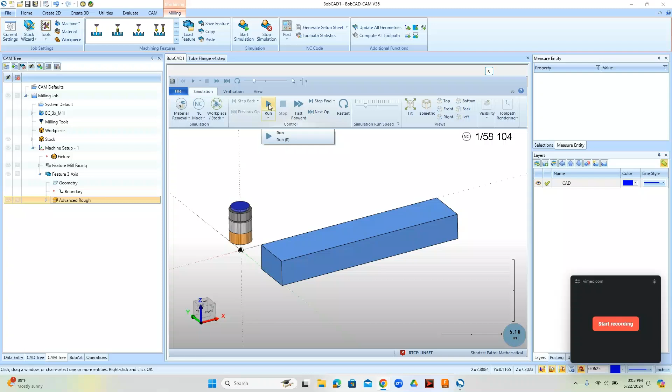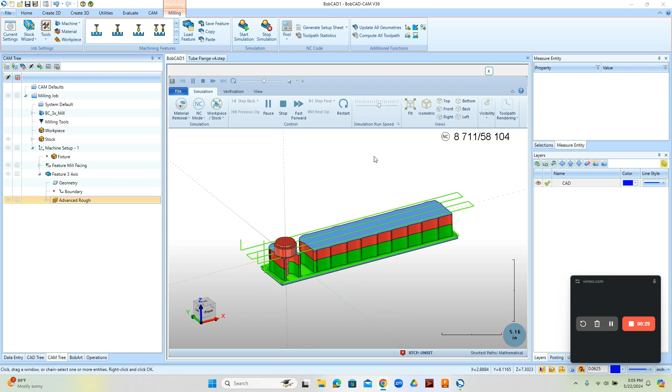This is where instead of machining one part at a time, we're going to machine multiple parts at a time, cut out of one strip of material. So instead of cutting a bunch of smaller blanks and holding them each separately, we're going to take a longer strip of material and copy the part down so we have multiple parts that we can cut at one time, with the goal of speeding up our production.

And if you got the right flute length, you're not going to be seeing all this red. But let's go ahead and get into it.

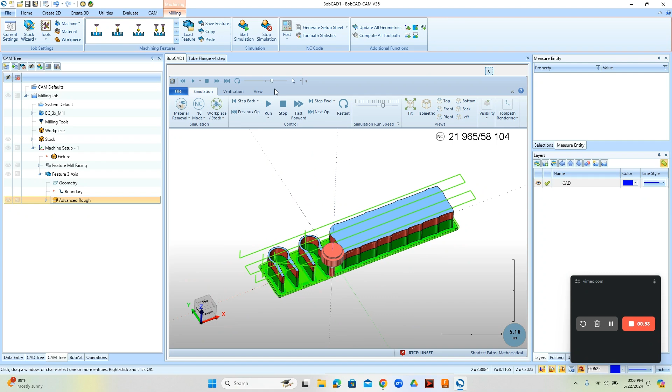Okay, so let me stop this simulation and come back over to our part geometry. So this is the part that we want to work with, and the first step that we want to do is make however many copies we want to make.

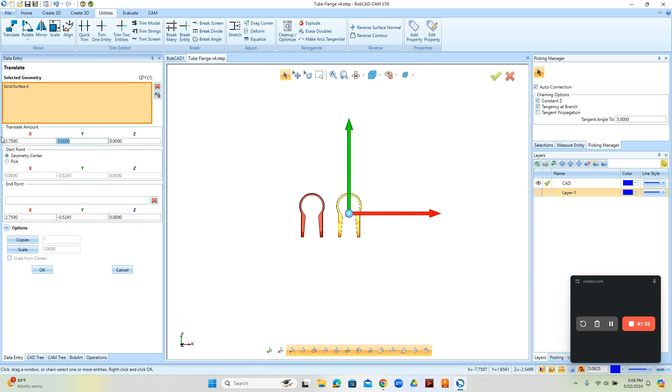So we're going to go to Utilities, Translate, select our part. We're going to set our spacing in between. It's important that the spacing in between is great enough so that the tool can fit between it. And then we'll set the number of copies that we want to make at a time and choose OK.

Alright, so what we've done is instead of just working with one part at a time, we made copies for multiple parts at a time.

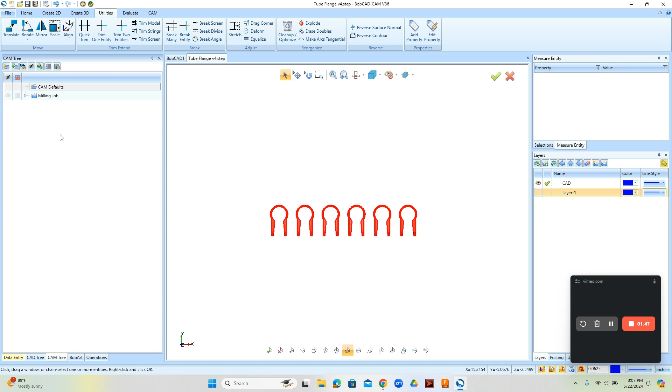Now the next thing we're going to do is just go in and set up our job. We'll make sure to select our workpiece here. It will use the bounding box in order to find the min-max. We want to add a quarter inch all the way around, and then we'll add a little more material on the bottom. So we'll box it in but leave some stock on the bottom so we have something to hold on to, and then we'll choose next.

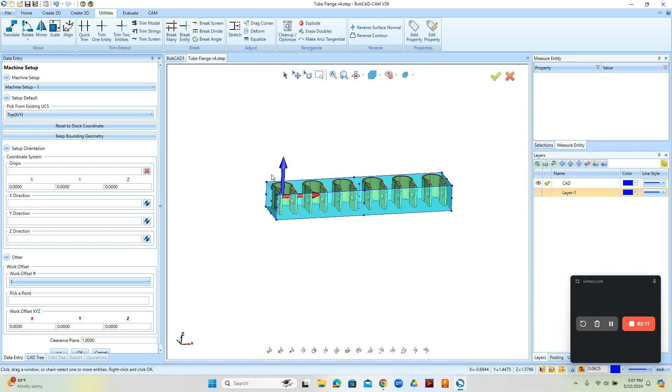From here we can come in and pick up our zero position, so we're going to grab this position here and then we'll choose OK. Alright, now we got our stock set up, we have our parts set up.

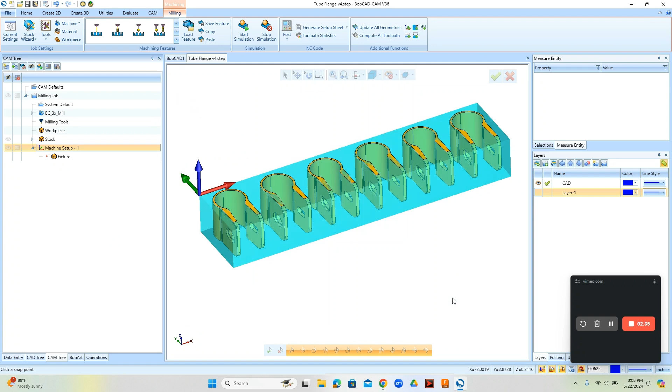We might want to run a facing routine to begin with. So using the facing routine, we can really just set our tool size and our cutting parameters, and if you have your stock set up and you've selected your work pieces, it's going to automatically pick up that boundary. So we'll go ahead and face off the part.

Alright, now the next thing we want to do, we could come in and extract geometry and do 2D machining, but 3D machining is going to be easier for this. So we're going to load in a Mill 3 Axis. We'll go ahead and select all of our part geometry here, or our workpiece, and then we're going to use an advanced rough routine. Alright, so we'll load in advanced rough.

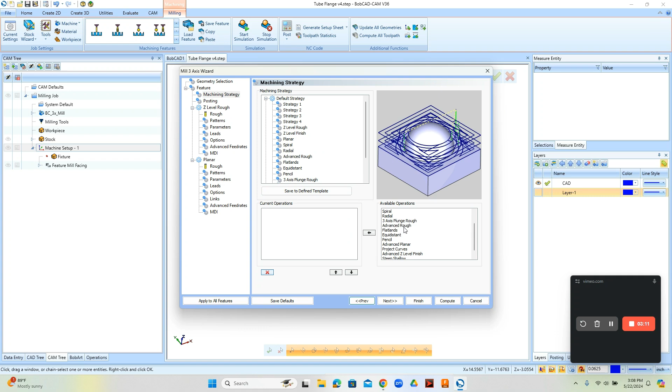We'll go ahead and set the tool size that we want to work with. We're going to choose adaptive. We're going to talk about the depth here because we want to cut all the way down to the bottom. We want to do it in one pass. Our step over here, we'll just set it to .200 for now.

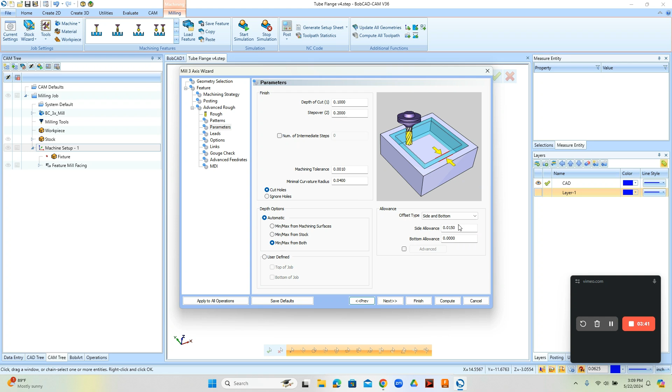Our machining tolerance, I'm going to loosen up, and I'm going to just leave a side allowance for a profile finish, but the bottom allowance is going to be 0. Alright, let's look at our depth of cut. I'm going to set this to, let's say, 2 inches.

Alright, and we're going to just compute at this point. So it'll take a moment to calculate, and you'll see that we generate all our toolpath.

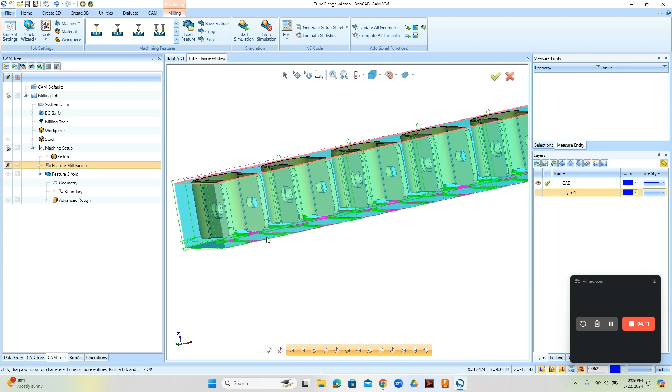Now let's go ahead and blank out the facing routine. And one of the things that you're going to notice is that the toolpath does cut down to the bottom of the part, but then you'll also notice that it cuts down to the bottom of the stock. Okay, so there's a variety of ways that you can control where you cut.

You can use stock to limit it, advanced stock, you could use a boundary, but in this case we want to come in here under the parameters option and our depth, and by default I have it set to min-max for both, so that means it's looking at the machining surfaces and it's looking at the stock. So in this case, we only want to look at the machining surfaces, so it cuts down to the bottom of those surfaces.

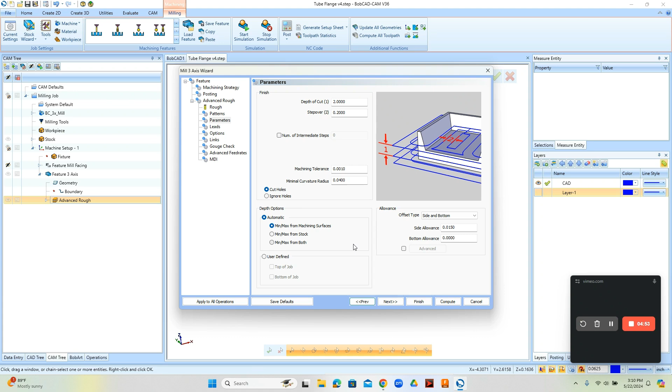We'll go ahead and recompute this. And now we'll see that the toolpath just comes down to the bottom of our workpiece. Okay, if we look at it from a front view, you can see it's cutting down to the bottom, and it's also leaving stock on the wall so we can come back and do a profile finish.

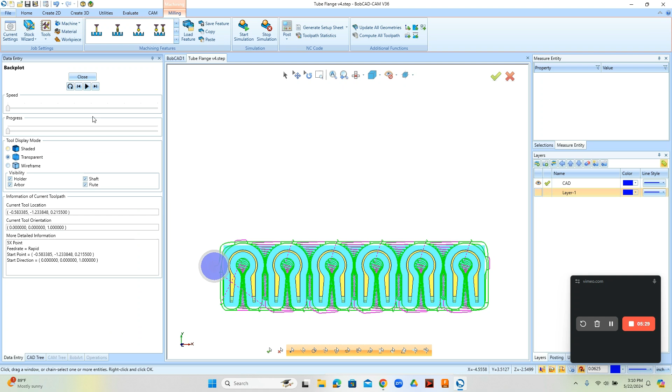Okay, now the other thing that I want to talk about is which side of the part the tool starts on. So if we right click on our advanced rough and choose backplot, you can see it's starting on the left side of the part. Now, depending on your setup and your table configuration, you may want to choose where on the part you want the tool to start, whether it be the left side or the right side.

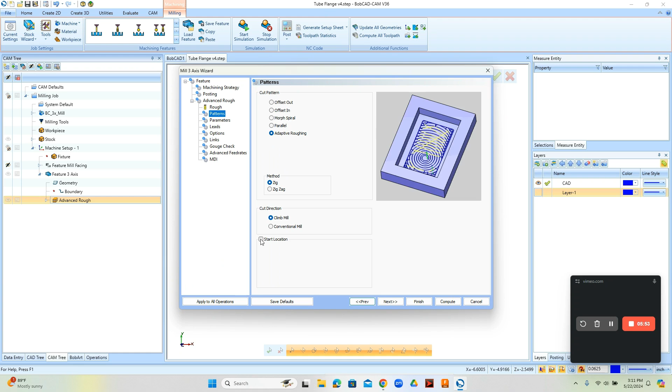A good way to do this, you can just sketch a point location. You can say, alright, I want the tool to start from over here. And then when you're in the patterns here, you can choose start location, and you can pick this point. So we'll go ahead and pick this point location, and we'll choose OK, and then we're going to recompute. And what that will allow us to do is choose where the tool is going to start from.

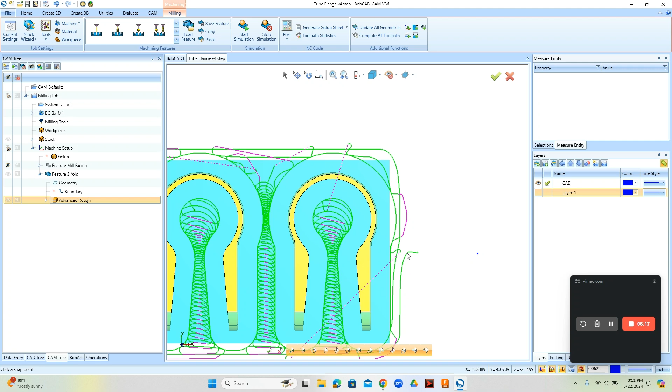So you see it doesn't start in this particular point right here, but you do see that it starts on this side of the part versus starting from the other side of the part. So that can be helpful, especially if you have a fourth axis on your table or another vise over here. Being able to choose where you start is definitely an option that's useful.

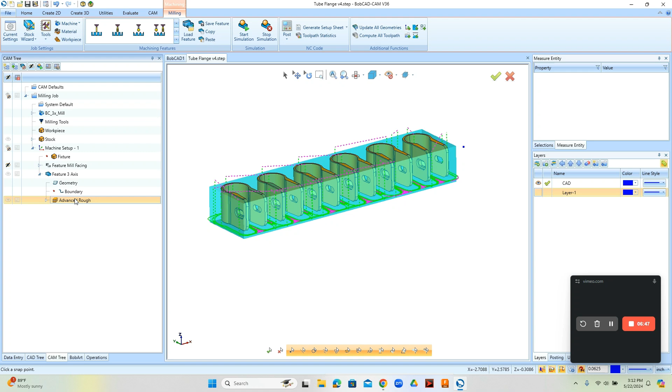So yeah, there you have it. Instead of cutting one at a time, you can cut multiple at a time. When you're using your advanced rough, instead of using min-max from both the stock and machining surfaces, you can choose just the machining surfaces. If you guys have any questions, comments, or feedback, just reply back to wherever this video may be posted. Otherwise, I look forward to seeing you in the next one.